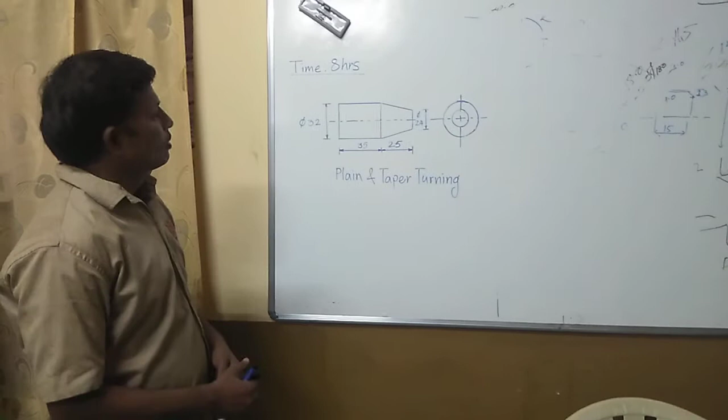In our next machine shop practical session, we are going to do this job with this given dimension, in which we will do plain turning as well as taper turning.

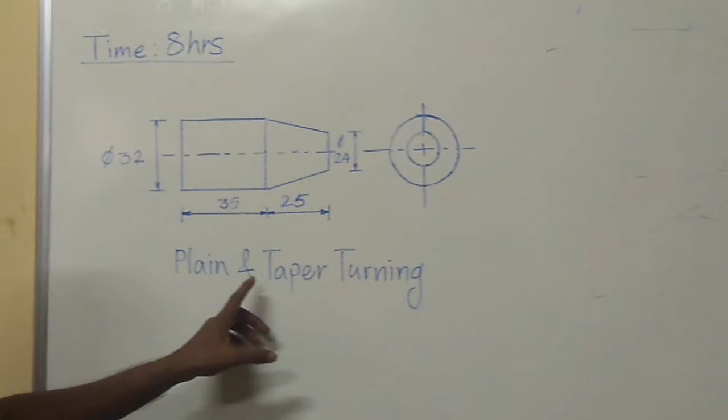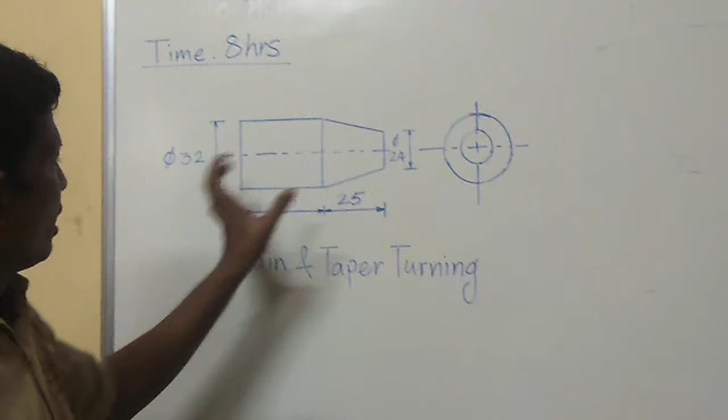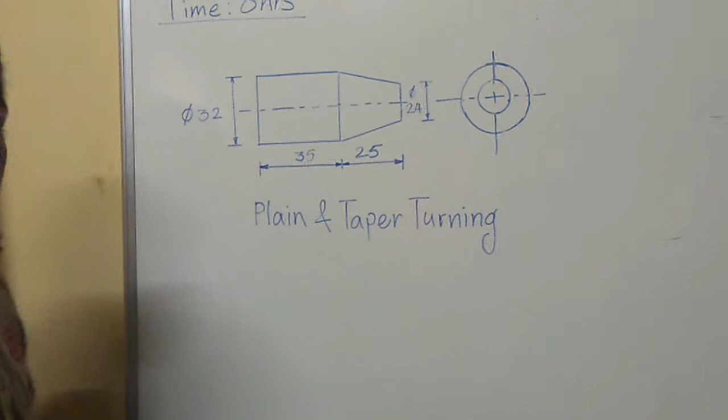The major diameter size is 32 mm, minor 24 mm, length of 32 mm diameter is 35 mm, and length of this taper is 25 mm. The angle of taper you have to calculate, and accordingly you have to set the compound rest.

We have this side, this dimension and this dimension. Using this you have to calculate this angle with trigonometry.

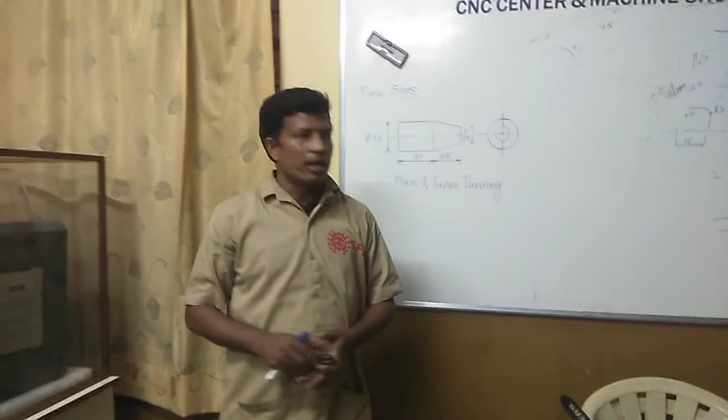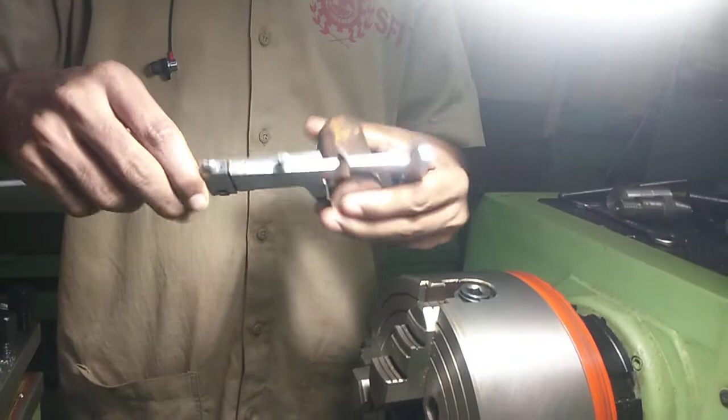So we will be having raw material of 35 mm diameter. This is our raw material, and it has a diameter of 35 mm. That means 3 mm more than required.

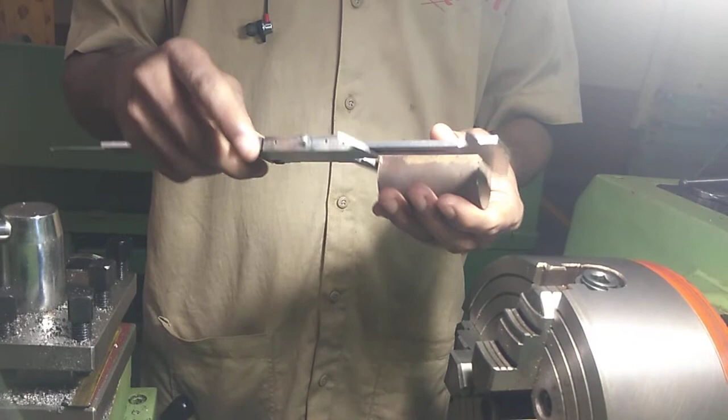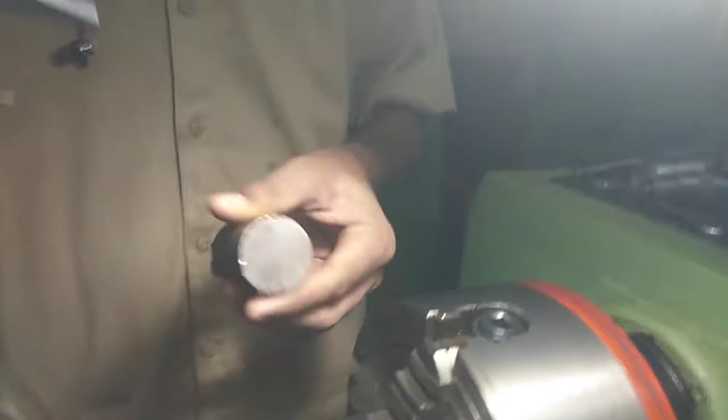Our major diameter size is 32 mm, and the length of this job is 65 mm, and our final length of our job is 60 mm. That means 5 mm more, and this has been cut in slant.

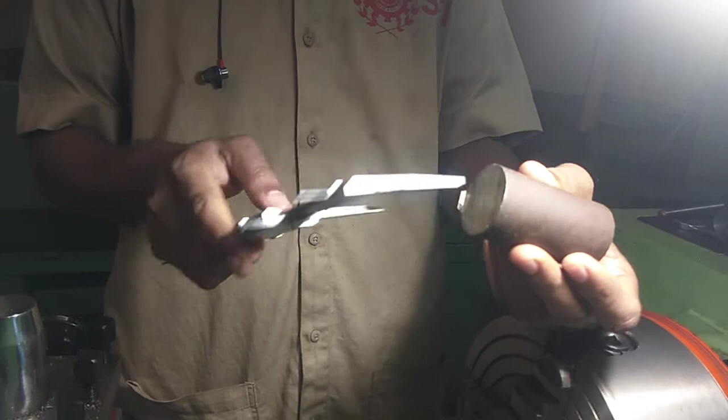The cut is not parallel to the axis of the job, so we have to do facing, and we have to make it parallel to the axis first.

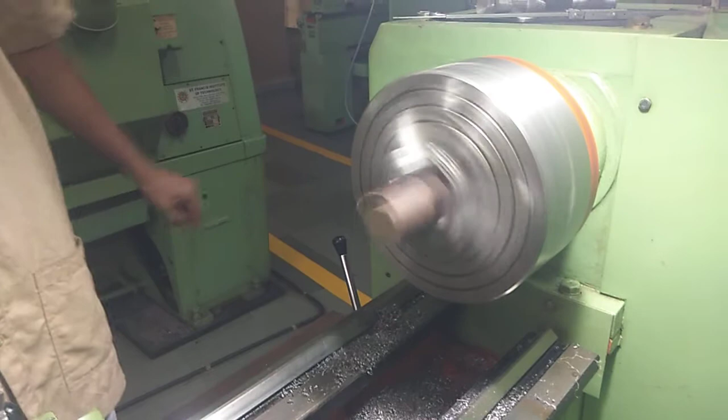We are fixing the job in chuck. Rotate the chuck. It's not true. The axis of the job and axis of chuck is not matched.

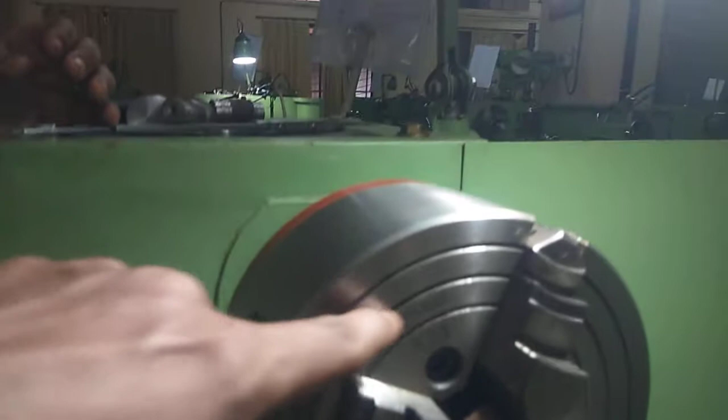In our last session we saw how to true the job. For that we use one tool called surface gauge. Here we can use these grooves, these circular grooves made on this chuck as a reference for truing the job.

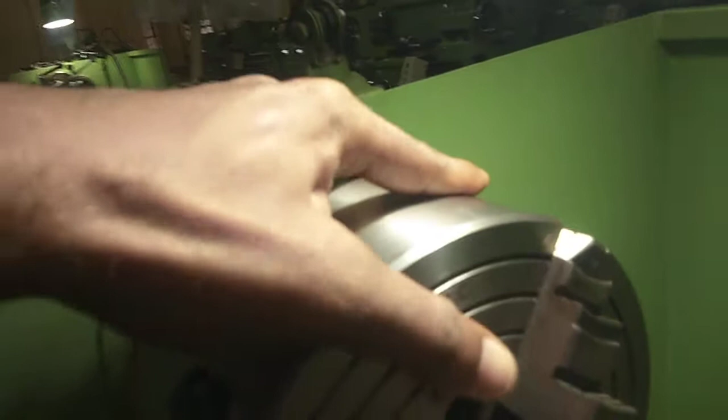You can see, select any one portion point of this jaw. This is the movable jaw, independent jaw, which moves independently, not like a 3-jaw chuck. In a 3-jaw chuck, when you rotate the chuck key, all 3 jaws move simultaneously towards the center or away from the center.

Here every jaw, this is a 4-jaw chuck, moves independently. You can see this part of this portion of the jaw, this corner, this line is matching with this groove. See the opposite jaw of it.

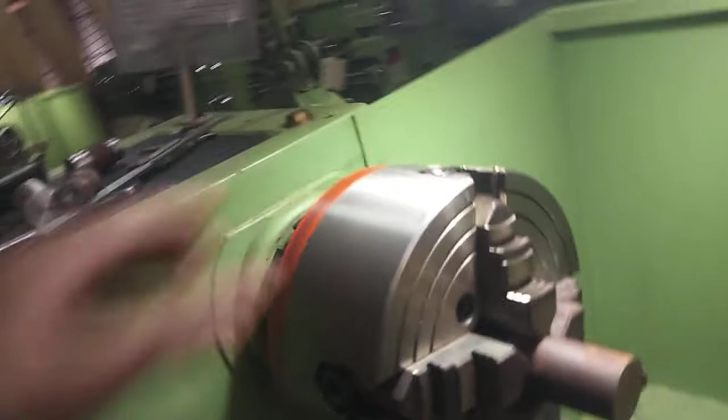This was jaw number 4, its opposite is jaw number 2. Jaw number 2, the same portion of jaw is matching with the second groove line. So that's why the job is not in the center of the chuck.

We will adjust both the jaws accordingly.